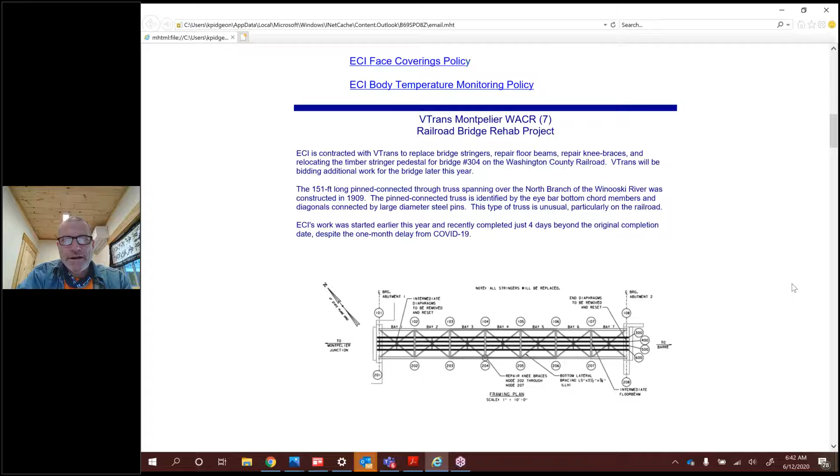So for the project this week, we are looking at the VTrans Montpelier WACR 7. That's the VTrans contract designation for the railroad bridge rehab project in Montpelier. We're contracted with VTrans to replace bridge stringers, repair floor beams, repair knee braces, and relocate the timber stringer pedestal for bridge number 304 on the Washington County Railroad. That's right downtown Montpelier, just off of Main Street. VTrans still has more work to do on the bridge, and they'll be bidding additional work later this year.

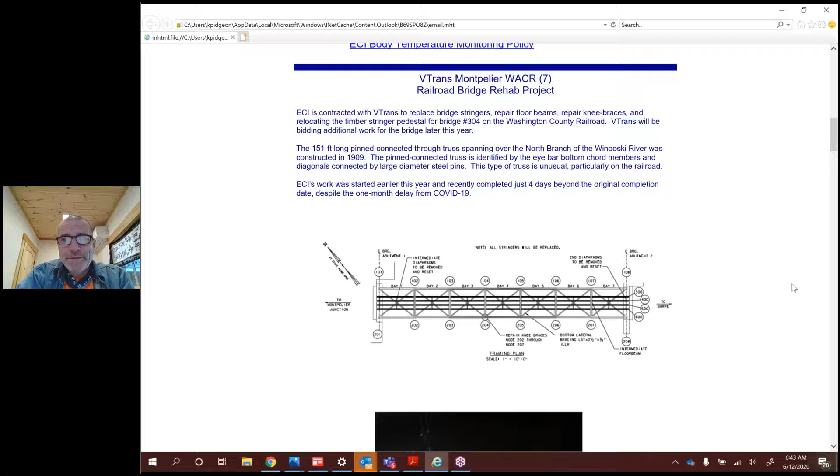The 151-foot long pin-connected through truss spanning over the north branch of the Winooski River was constructed way back in 1909. The pin-connected truss is identified by eye bar bottom chord members and diagonals connected by large diameter steel pins. It's quite an unusual bridge, particularly on the railroad, and I'll point out some of the features in the photos below. So ECI's work started earlier this year, and we recently completed it just 4 days beyond the original contract completion date, despite a whole month delay due to COVID-19. So we've done very well getting things done and getting back on track on the railroad tracks.

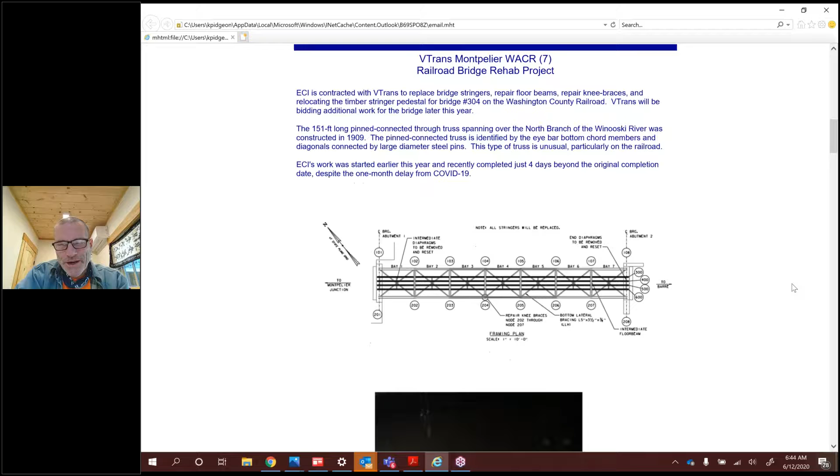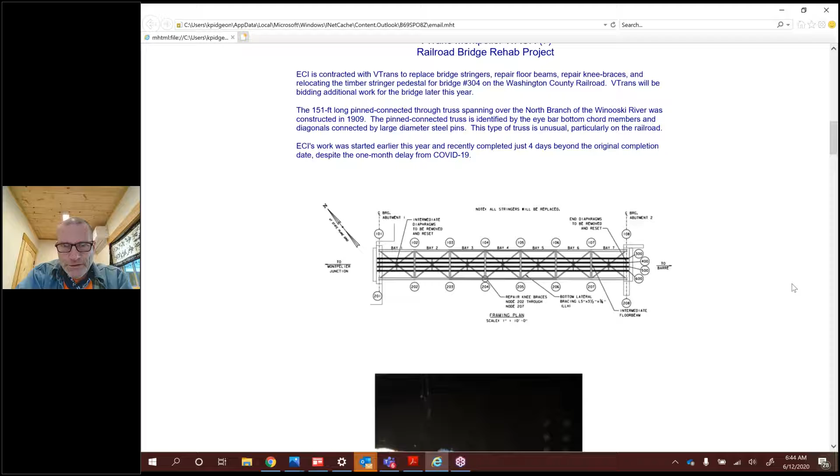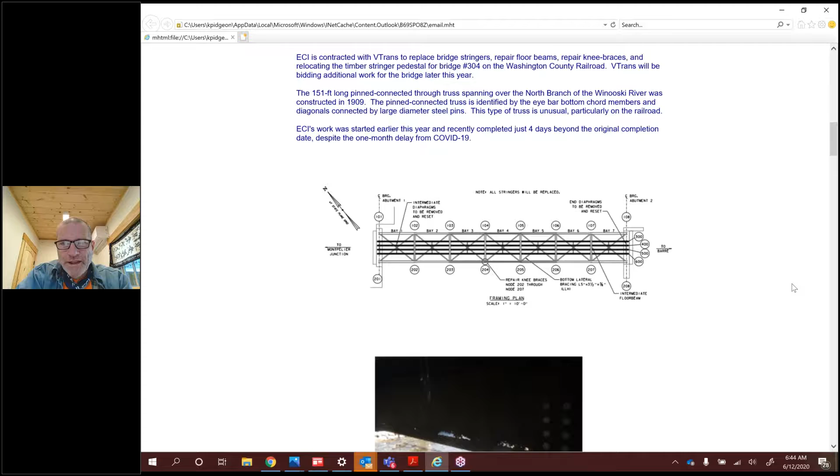So this is a depiction of the framing plan of the bridge on this first image. The stringers are the longitudinal sections. There are 4 of them. They are supported at the floor beams within the truss. This is actually from a report done on the bridge last year, I believe, by a consultant, and they show fairly clearly with a light background that you could see through the bottom of the web of the stringers. So pretty serious section loss there.

And this is a knee brace at the corner. That's where the floor beam attaches to the truss, and the knee brace is a way to transfer shear forces from the railroad tracks through the floor beam and up into the truss. And obviously those are severely compromised and are effectively providing no structural value. You can see down below the floor beam, there's a cope at the bottom of the beam itself to allow for the hinge pin in the truss and the eye bars that I mentioned above.

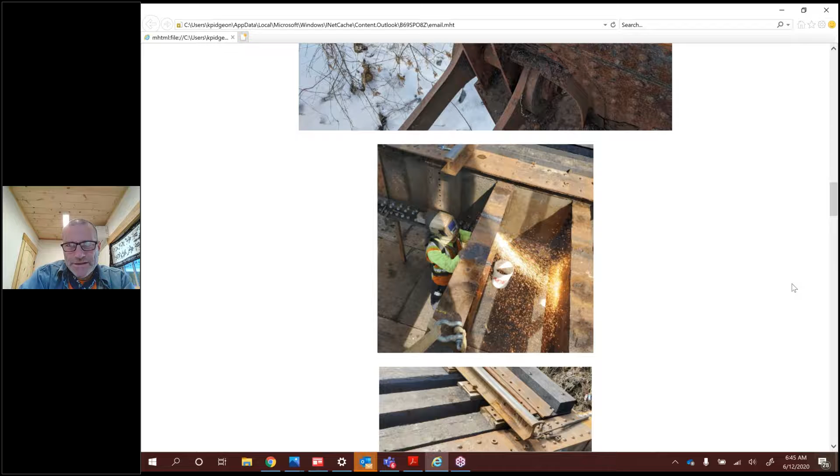So here we are, looks like we're taking out some of the stringers. That's the floor beam running right to left roughly, and then up and down the image are the stringers. There's 4 under the tracks. This looks like they're pulling off the final 2 on one of the bays.

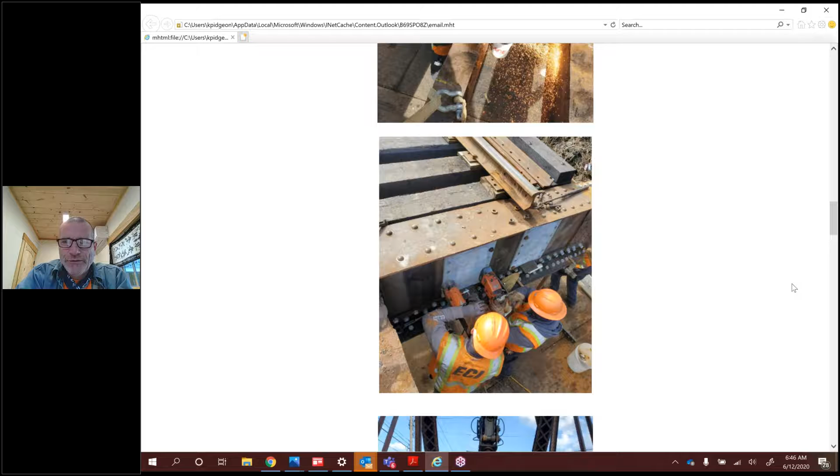And then there's some repairs I mentioned to the floor beams. This is a floor beam, and the floor beams also have some section loss in the webs and also needed some reinforcing to where the new stringers attach. So there's a pair of stringers, one at each of those galvanized plates, and you can see we're field mag drilling for the bolt holes and the bolts on the plate to the web of the floor beam.

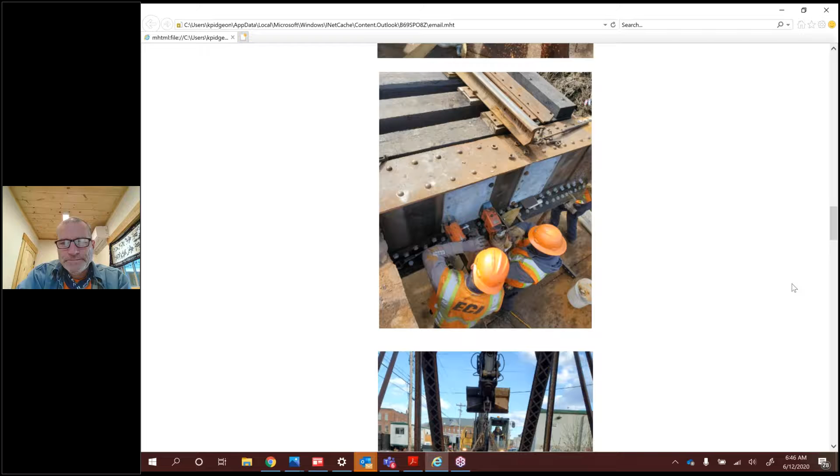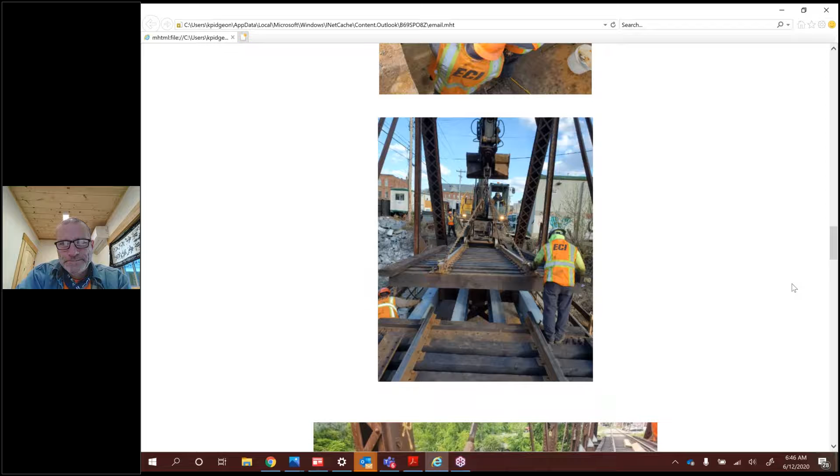There we are, putting a track panel back in after completion of the installation of the stringers and the other work underneath there. And here's some of the completed work. Just the other day, we're just picking up, and the knee braces are installed. New bolts, galvanized bolts.

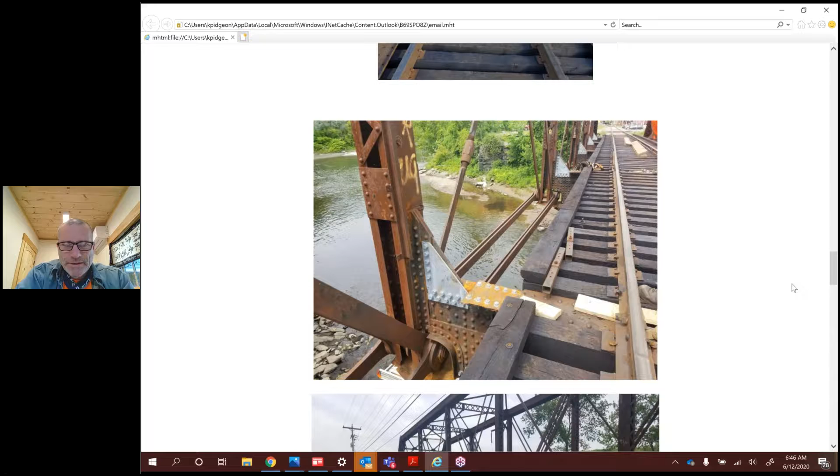And then this is a side view with some of the new, they're all new stringers there. You can see, I don't know if my mouse appears. Does my mouse appear? It does, Ken.

Oh, okay, good. So there's the eye bars, and they also serve as a diagonal. So remember, on a truss, especially a simple supported truss where you're supporting at just both ends, the top chord is under compression, and the bottom is under tension. So as a tension chord down here, you can have almost a chain, because it is really a chain. If you look at it, it's like a chain. And then the floor beams are here. They span over to the other hanging member.

So the load starts from the track, goes into the stringers, the longitudinal ones, and they're distributed to each end of the stringer to the floor beam. And the floor beam comes down to this member here, the hanging vertical member. And then there's a pin here that provides the attachment to the bottom chord and the diagonals. So it's a very unusual design. There's only a couple railroad bridges I know of in Vermont that are like that.

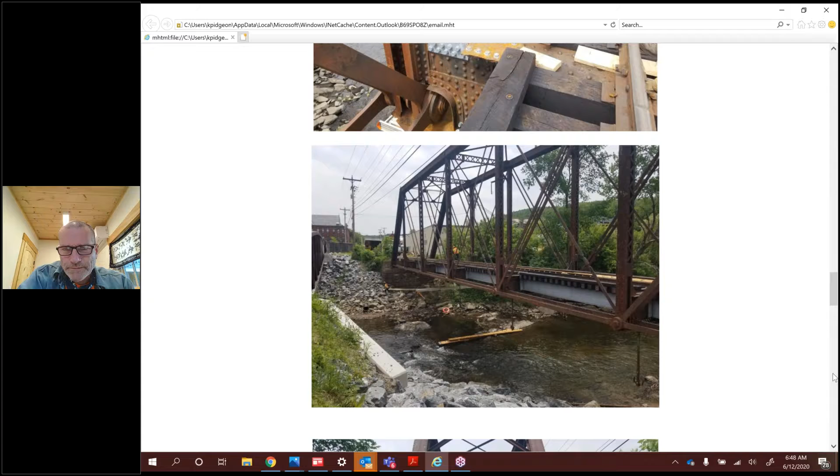And there's the crew. They look like a bunch of bandits there on the railroad, ready to jump on the train and rob the train like the old days or something with their masks on.